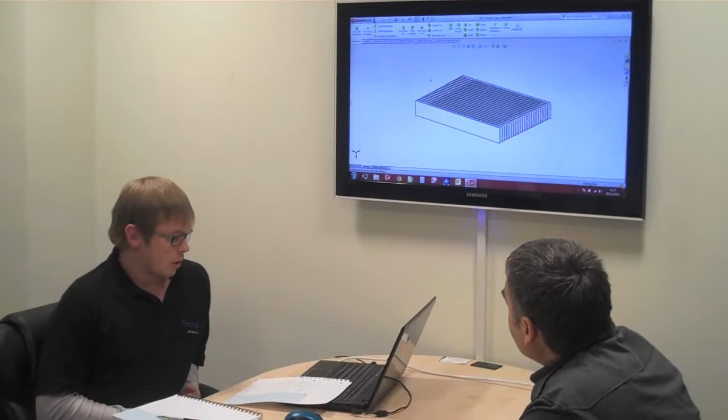We're going to compare your design requirements to something we already offer and tweak it more to your design, not the internals—we've got all that to figure out now. This is SolidWorks, the program we use to do all our 3D designs. Its benefit is we generally build a pocket of a unit with no real features, and from that we can add on little features like extra drive bays and CD drive bays. With this design it's quite simple, so we're actually going to work back from a similar design we've got.

The other benefit of this program is we can start with a simple drawing and turn it into a quite high quality render. So before the machine's even been manufactured, the customer has a very good idea of what it's going to look like, as well as all the options. Since we have a lot of the components drawn up in this program, we can show how it would look with a particular foot, a particular colour, or artwork, to really get a good idea.

And we can, within a millimetre, actually replicate what's on this screen to what you end up with in your hand.

This design here is normally a completely headless system. So what we're going to do is add a switch on it, and as we go along you can tell me what features you'd like to add or remove to get it looking how you'd like. So the first step we'll do is add the power switch. You could have a unit like this with no switching at all if it was headless, which is what this one was originally designed as.

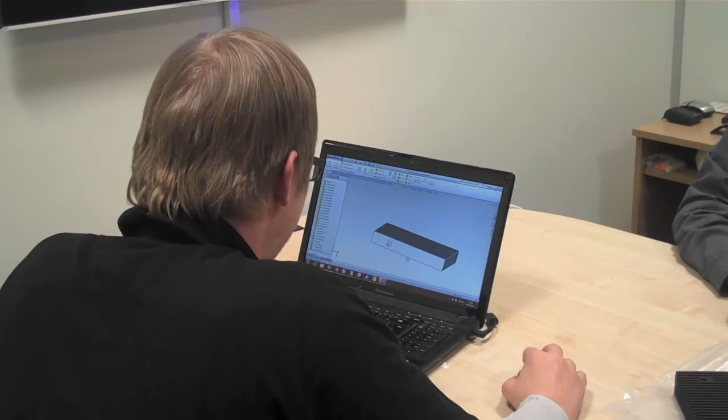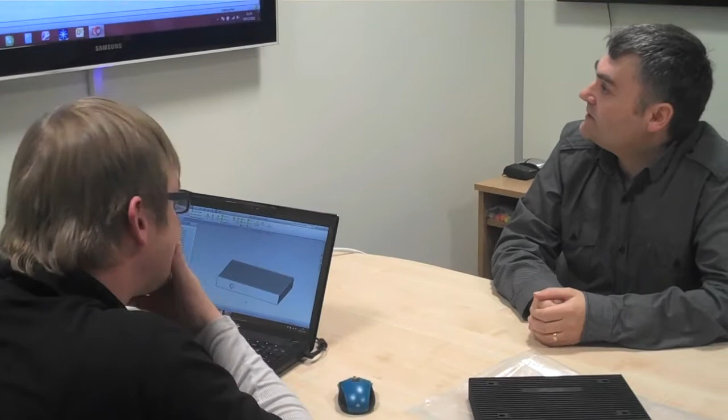This unit here would now offer all the specs that we're looking for. There's just some things we can do to make them look a bit unique for your product, for your range. So I don't know if you have any ideas of what you'd like. I thought maybe if the front was a bit more curved somewhere, so now you feel that it's solid, you can then start to cut away from it.

So a bit something like just something a bit smoother now. So what I'd suggest to do from this, if you're happy with the look of the unit now, we'll start to add some components to it.

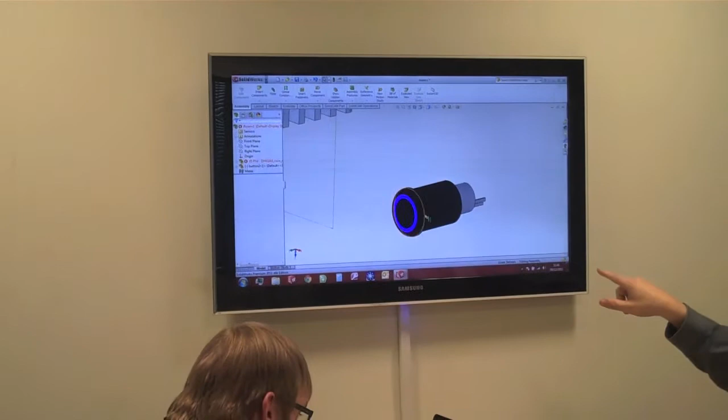So these are the type of feeds and the power switch, and here's an example with this particular switch on it. And this is quite a raised one. Could you make sort of like a more flush one? We've got other switches with that. That's good. Obviously it seems quite bulky, but once it goes in the case it's a lot slimmer than these. That's got a little power LED ring as well, it's quite a nice one.

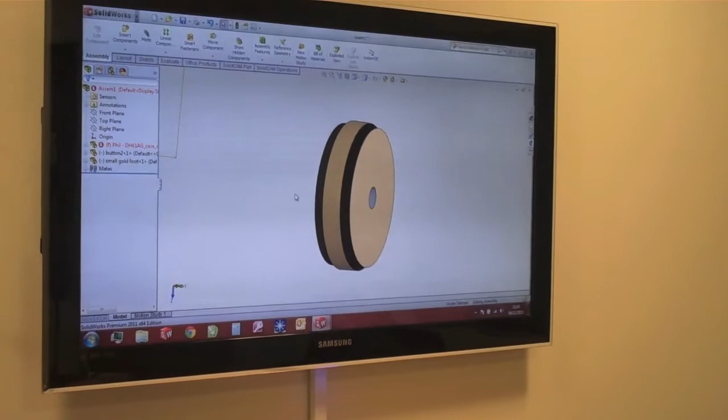This one, which we can show you, is actually got brushed aluminium. We'll add the base and the feet now. This is a foot I'd recommend, it's quite nice for a media center. It's actually got a rubber mounting on the bottom. It's made out of plastic with a ring of gold - I don't think it's real gold. It gives it quite a nice effect. But if you were willing to pay for it, you could have real gold as well.

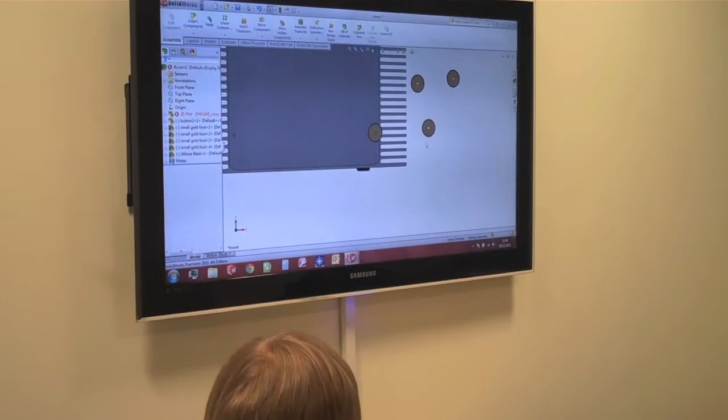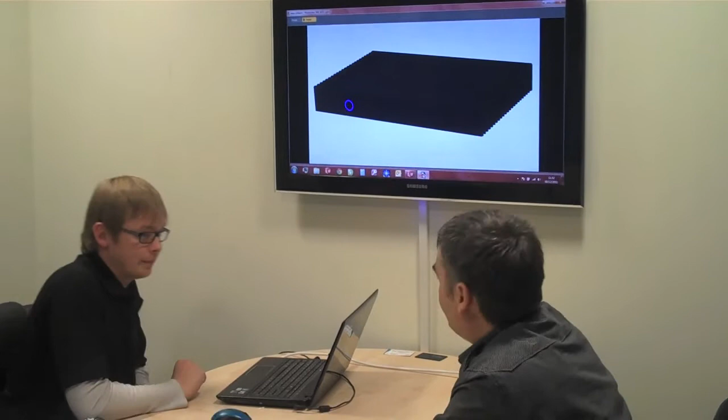Now if you'd like, we can put together some more realistic looking pictures to get a good idea of what the system will look like. Yeah, you can see now that it looks like a finished product. So it removed the extra fins and rounded the corners, put the button on there. That looks really good.

So once you've got this design now, how can you get this? How much effort does it take then to get this into the process of actually starting to build it? Well, we would run a few checks, as I showed you earlier - check the properties, thermal, and so on. We'd check we're happy with everything.

Then we would hand this on to one of our programmers. Now the programming does vary depending on the complexity of the product. For this one, as we've used something similar to what we've got, to get this machined and programmed, I would say it would take around 30 minutes to an hour to reprogram it for this design. There's not really much more to showing the design - if you're happy with the look of it, you can probably pass this on to one of our programmers.

After we've done some quick checks on the thermals in the program, we will pass it on to a programmer and they can start programming it up and give us an ETA on how long it'll take them to machine it. Right, so yeah, get it to the programmer - let's go and have a look at how that's done.

Right, so where are we going now? Now we're going to go down to the machine room and I'll introduce you to James. He's one of our programmers and he also runs the machine, and we'll start getting stuff input so we're ready to put that design through.